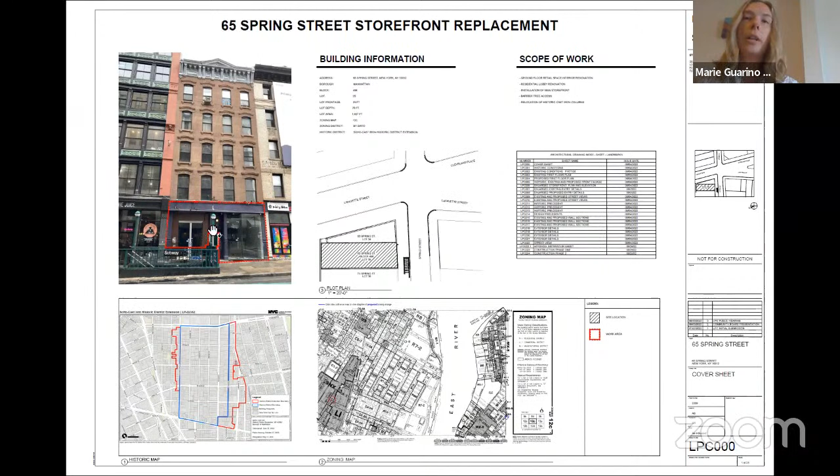Good afternoon, commissioners. Marie Guarino, preservation staff. The item before you is for 65 Spring Street in the Soho Cast Iron Historic District Extension. The building is located on the north side of the street between Crosby and Lafayette Streets. The application is to replace storefront infill and to relocate the historic cast iron columns.

Here are the 1940s tax photos. You can get an idea of what the historic storefront looked like, with the projecting storefronts and cornice. These are the existing condition photographs. The historic columns are all intact and located in their historic location, but the infill is modern.

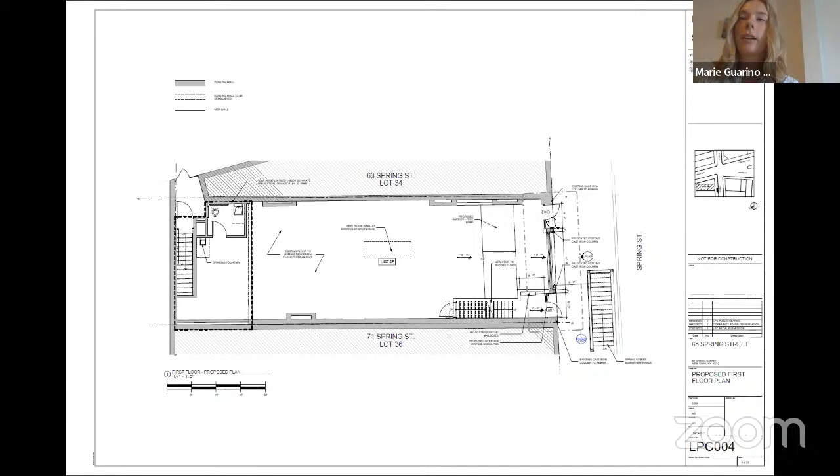Here's our existing floor plan. You can see there are 2 small storefronts flanking the central residential entrance. And here is the proposed plan. You can see those 2 columns have been moved outwards to create one large storefront with an entrance at the east side of the building, and the residential entrance being moved to the west.

So here's the assumed historic condition, the existing condition, and the proposed. You can see in the proposed, these middle columns are shifting outward to create one large storefront window. This will be the retail entrance on the right and the residential entrance on the left. The residential entrance will feature frosted glazing at the door and the side light, and an existing plaque will be relocated over the side light.

This plaque is commemorating a previous tenant. The proposal also includes a new metal cornice with details that recall the historic cornice.

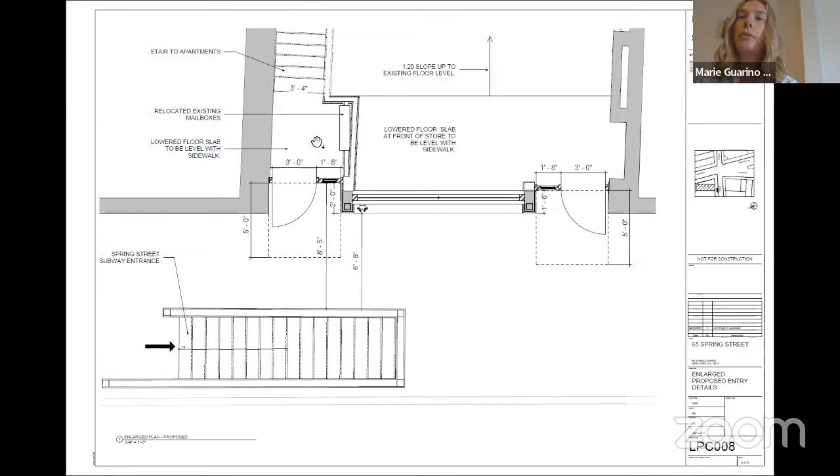Again, we have our existing and proposed drawings, and here's an enlarged floor plan of the existing condition. One thing to note is that at all of the entrances, you have to step up. Part of the proposal is to lower the front of the floor slab to have at-grade entrances.

And then we just have some existing and proposed street view renderings. The applicant, Robert Bianco, is here to take you through the rest of the presentation. Thank you, Marie. Robert, would you like to add anything at this point?

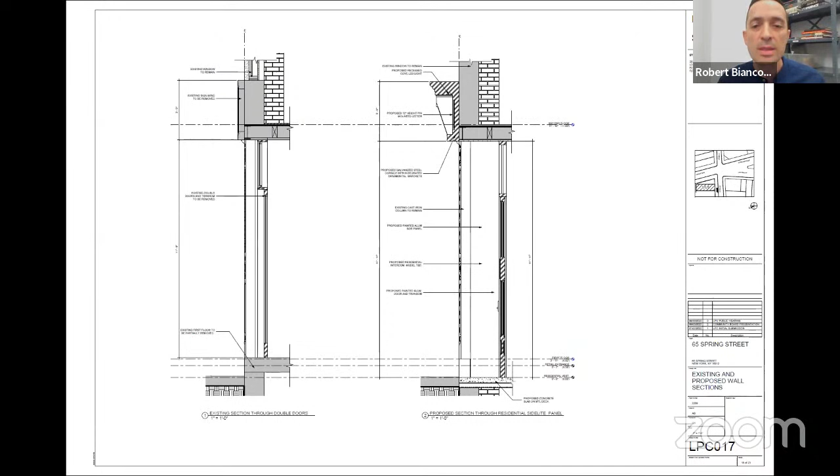And then a similar section at the residential entry door. Next slide.

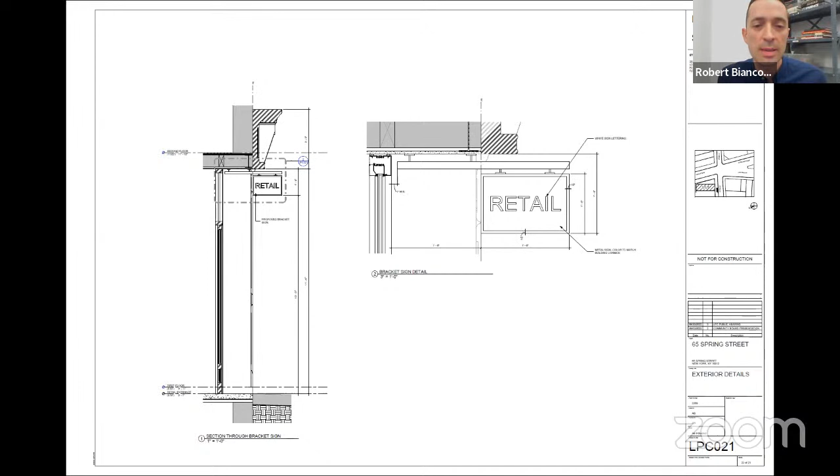And a bracket sign which would comply with all landmarks rules located directly above the retail entrance. And I think we'll end on another image. Next slide, sorry.

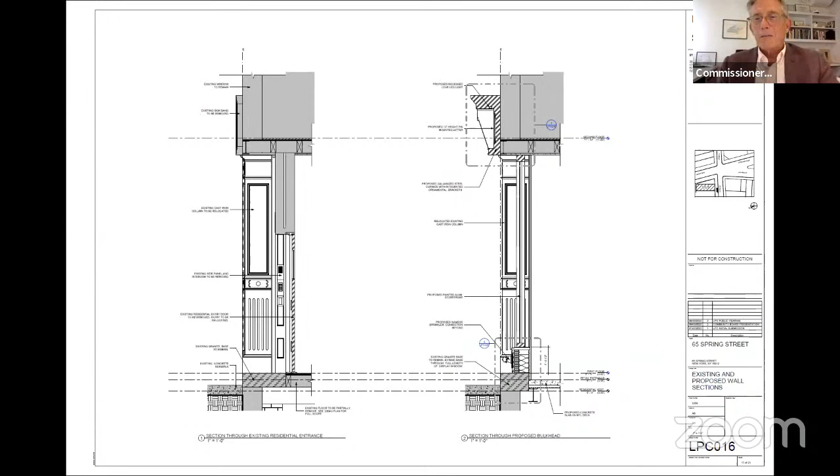Yeah, particularly in the display window, it seems like you could do that. And as a recompense for moving them from their historic location, maybe that's something that's worthwhile thinking about. Anyway, thank you. Great, thank you.

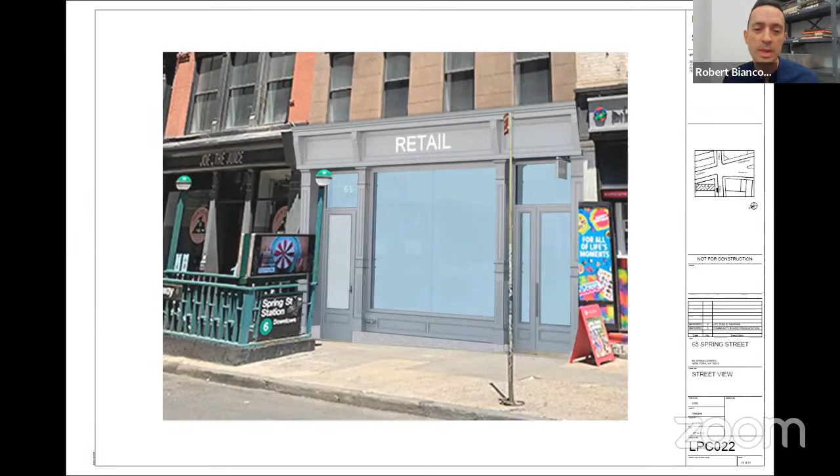Sure, thank you. I do want to address those concerns about tenancy, occupancy, and construction disruption. We included in this presentation, if you could go to the appendix drawings. I don't want to focus on this too much, it's not really part of the application, and these will be much more developed further, but the Department of Buildings has very strict requirements for tenant protection during construction.

The good thing is that the first floor retail spaces are vacant, and the second floor apartments are vacant, so that new entrance and stair can be constructed as a first phase of this project. On the next page, that central stair is being maintained, so there is no plan to move the current access stair for the tenants on the 3rd, 4th, and 5th floors.

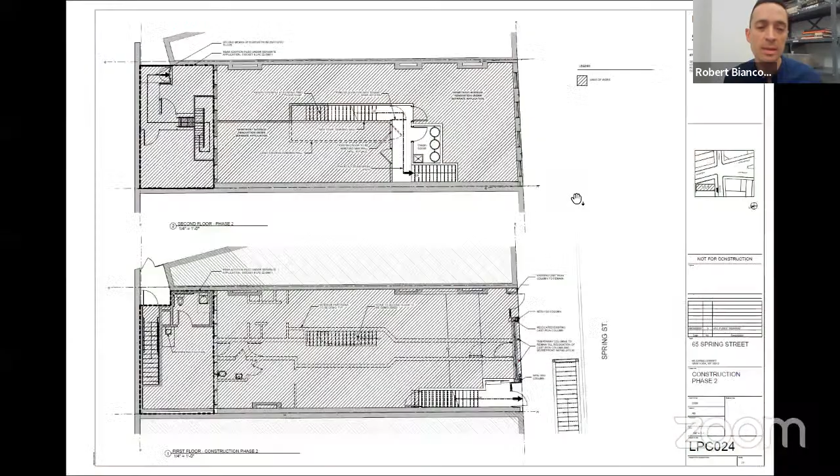If you could go, Marie, to page 8, I'll talk about the accessibility concerns. The current condition at all doors is in no way ADA accessible. There's a step up to every door — an 8-inch step up to the residential entrance door, and just 3 feet between the two columns. What we're proposing on the next page would provide all of the required ADA clearances, the 18 inches on the pull side of the door. That residential entrance door will be recessed into the building, so even though it's located behind the subway entrance, there's still 8 foot 5 inches clear from the door to the subway entrance.

Do you want to address again the appropriateness of relocating the cast iron columns? Sure. Like we pointed out in one of the slides for precedent, there are other mixed-use tenement buildings with original configurations that had one large store on one side and an off-center building entrance. I believe what happens in those buildings is very similar to what we're proposing with the stair — slightly different, in that there's probably a long corridor when you enter on the first floor, and then you turn and transfer over to that center stair.

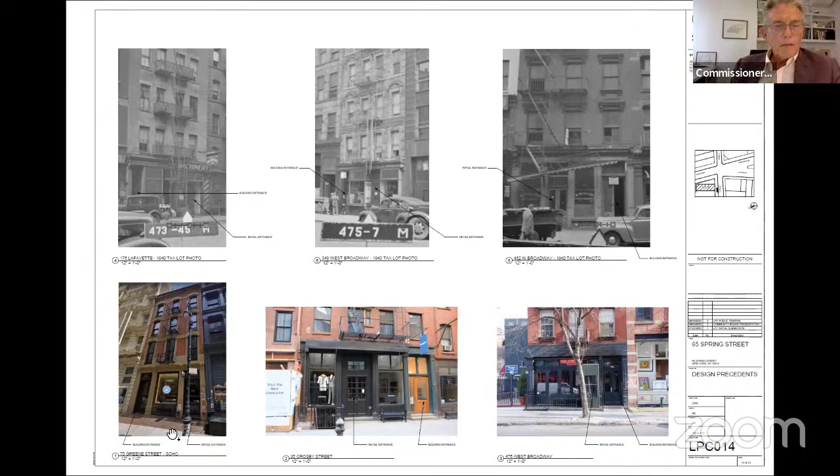No, not to that width. I think there is the photo on the bottom, 70 Greene Street — it's a narrower building, and that does have a single display window that goes from bulkhead to underside of cornice. Is that the lower bottom left? Yes. But no, not quite that configuration. We do believe that the historic configuration at this building, although the display windows were much narrower, it looks like from the 1940s tax photo they went from the bulkhead to underside of cornice.

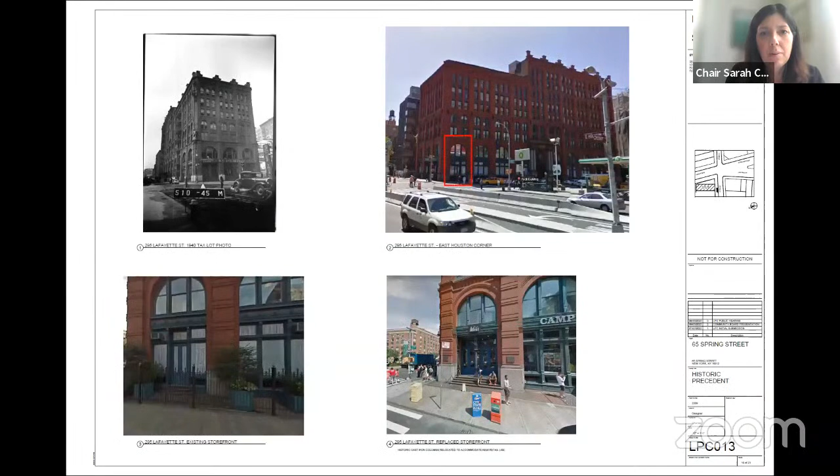Okay, and what was on the next slide? Were there other examples of streetscape? I thought there were some other streetscape photos. No. Oh, and then previously, 155 Mercer is a different building type, but also has a larger center window. That modification was done prior to designation. Got it. Okay, other questions?

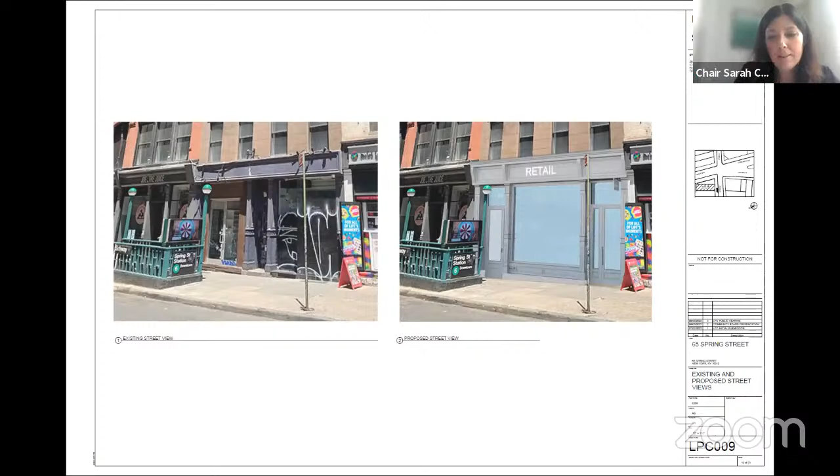Okay, so the hearing is closed and we'll begin our discussion. We've heard a lot of testimony about concerns with occupancy and use. Again, those issues are not under our purview, although we are sympathetic and hope those concerns can be addressed independently by the owner and the tenants.

In terms of the proposal before us, it is to relocate the historic cast iron columns to reconfigure the ground floor. This is something we have done before. We recently approved relocating cast iron columns on a stable building in the village, and we have also done it on buildings in Tribeca to reconfigure storefronts. So it is something we have done on occasion, and as far as we know, it has been done safely.

So the question is: is it appropriate in this instance, in this streetscape, in this historic district? And then is the resulting design of the storefront and cornice appropriate? So we'll begin our discussion. Commissioner Gustafsson, would you like to start this one?

Yeah, sure. I appreciate your last comment, because I recalled seeing us approve moving columns in the past in somewhat more controversial situations, where columns were much more significant. So I don't have an objection to moving the columns. I do have an objection to the large sheet of glass, which is disproportionate, and I don't think we saw any precedent for it. I think Commissioner Bland pointed that out. So that has to be resolved, perhaps with the transom.

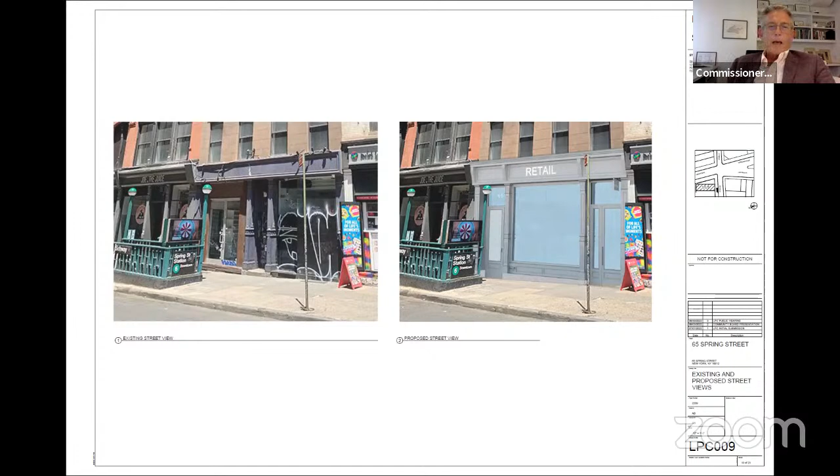But I'll stop by saying, whoever it was—I think it was HDC—said to at least paint it dark gray or black like the neighbors, instead of this light, wishy-washy gray. So there I am.

Thank you, Commissioner Jefferson. I agree with almost all the comments. I do think if they push the glass plane back and expose more of the columns, it would be a richer architectural product. The issue for me is this square window—square is always a powerful form, it's dominant. Whether they add a transom piece across or not, I have no real conviction one way or the other.

Okay, so I think we are unanimously comfortable with the relocation of the cast iron columns and the general basic design of the storefront infill with the panel bulkheads and the new cornice. I think most of us believe that the planes should be set back for the entries as well as the window to fully expose the cast iron columns.

And I think we want to ask them to continue to work with staff on the articulation of the central window, exploring the right proportions with a vertical or horizontal mullion, and to restudy the colors of the storefront and cast iron to be contextual within the streetscape, and to ensure that the cornice has enough level of detail and articulation to also be contextual.

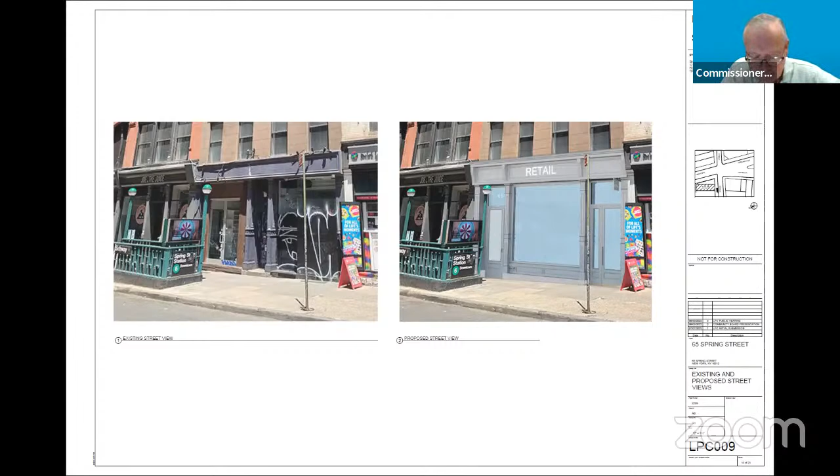Muted. Sorry, thank you very much.

All right, and Commissioner Chapin, would you second that motion? Second. Mark, will you call the vote?

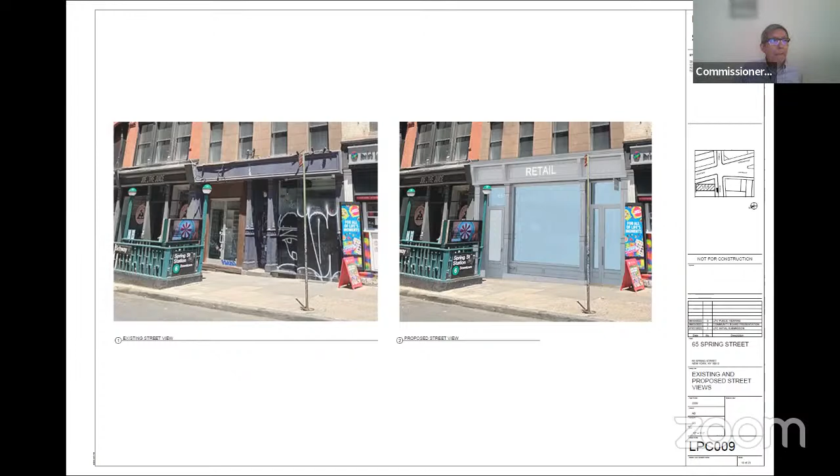Chair Carroll, aye. Commissioner Bland, aye. Commissioner Shamir Barron, aye. Commissioner Chapin, aye. Commissioner Chen, aye. Commissioner Goldblum, aye. Commissioner Gustafsson, aye. Commissioner Jefferson, aye. With 8 in favor and none opposed, the motion passes.

That's approved with the condition that you continue to work with the staff on these refinements. So please do so. Thank you.

Thank you. And we'll now move to public hearing item number 3, LPC 22-09003, an application for a certificate of appropriateness in the Borough of Manhattan, Block 622, Lot 63, 73 Perry Street in the Greenwich Village Historic District. This is a French Second Empire style row house designed by William Noggle, built in 1868, and altered after 1925 with the removal of the stoop, an entrance, and installation of a medieval half-timbered style bay. The application is to alter the facade and areaway, excavate the rear yard, and construct retaining walls.

Hey, Commissioners, the applicants have entered the hearing. They now have control of the presentation. The applicant team may begin. Please state your name for the record.

Hi, my name is Sharon Kim, and I'm the architectural designer of this project. Our proposal is for 73 Perry Street, located in Greenwich Village.

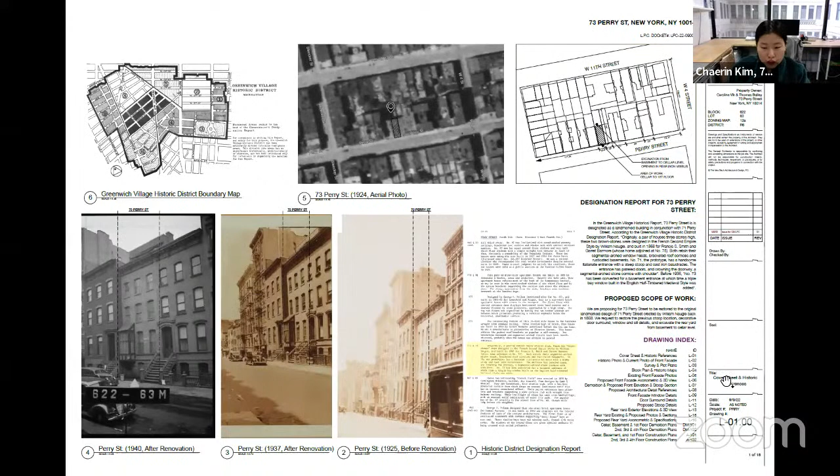We're proposing to restore the original stoop location, decorative door surround, window and sill details, and excavate the rear yard from basement to cellar level.

So from 1925 to 1937, 73 Perry has been stripped of its architectural elements that stay true to its original landmark design. The 3-story building was designed as a pair of brownstones with 71 Perry.

Both were originally designed with a stoop entrance, as seen in the 1925 photo. In present day, the original stoop was replaced with a basement entrance and a half-timbered medieval window, with 9/9 windows to match.

We're proposing to restore 73 Perry's original landmark design by restoring its original stoop location, designed in 1868 by architect William Noggle.

By doing so, we're requesting to restore again its original stoop location, but also replicating 71 Perry's historic architectural details of the facade and stoop area.

From historic photographs that we reference, the 1940s tax photo of 71 Perry, Perry Street is iconic for its buildings with a stoop entry and ornate entrances with a carved wooden door.

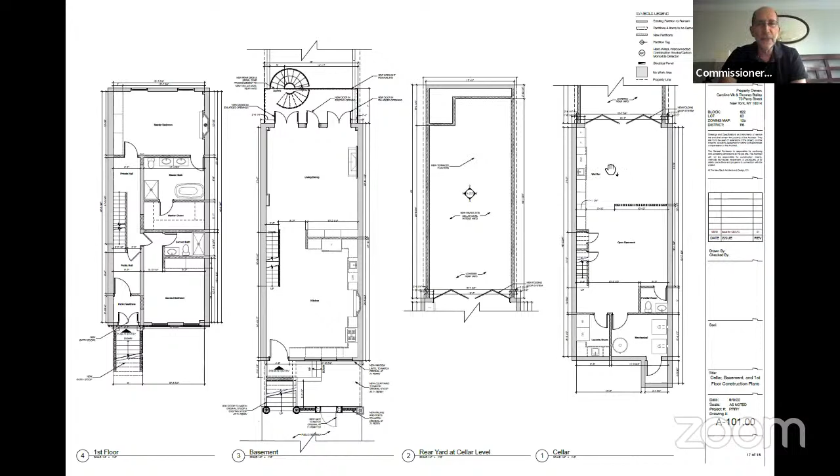Commissioner Goldblum: Thanks. All right, so the elephant in the room here is the peculiar and charming little Tudor bay window that you're proposing to move. Now, while there's no question that it's not original to the house...

Someone must have talked to you along the way about the fact that that's not our only standard, and that sometimes we look at subsequent modifications that have historic value as significant and worthy of protection. For me anyway, I think you need to make the argument, and succeed in making it, as to why we should permit the removal of that subsequent but charming addition in order to do what you're going to do. And I don't believe I heard that.

Yeah, I think, well, originally the 1868 design by architect William Noggle was with the original stoop location, and the removal of that stoop was happening especially when a lot of stoops were being removed from brownstones throughout the city, especially in well-known historic districts.

So if you walk across Perry Street, I mean, it's full of history, and to be the only building without a stoop is a bit awkward. We would like to maintain, again, like architect William Noggle has done, many stoops and brownstones across that area.

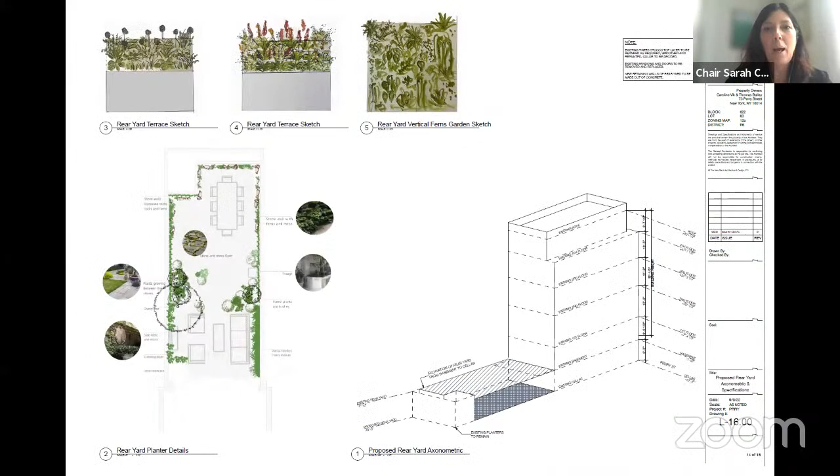And I'll turn it back to you, Chair Carroll. Okay, thank you. And I'd like to turn back to the applicant team and ask if you'd like to respond to the comments, largely following the line of questioning we've already started with, trying to understand more about the quality and condition of the existing bay window. So if you do have any close-up photographs or details, that would be helpful now to show us.

Then I think the community board commented on single pane windows. I'm not sure if they were referring to an earlier scheme or if they're referring to the 1/1 windows. Sorry, Chair, yeah, originally we were referencing the 1925 photo. That was the 1/1 windows. But again, the perspective of the photo is not very clear. So the community board was discussing whether the 1/1 was appropriate for the era in which the building was built, and they weren't sure. So that's where that comment, I think, came from.

I think we do actually have some photos, close-ups of the basement entrance. Maybe Sharon can pull them up. But basically it's two concrete walls on either side. It's kind of wet. You go down a few steps and the door is there. The bay window is in okay shape. We did notice some damage to the roof of the bay window. And like I said, the interior of that bay window is poorly fitted out in adjacency to the actual home.

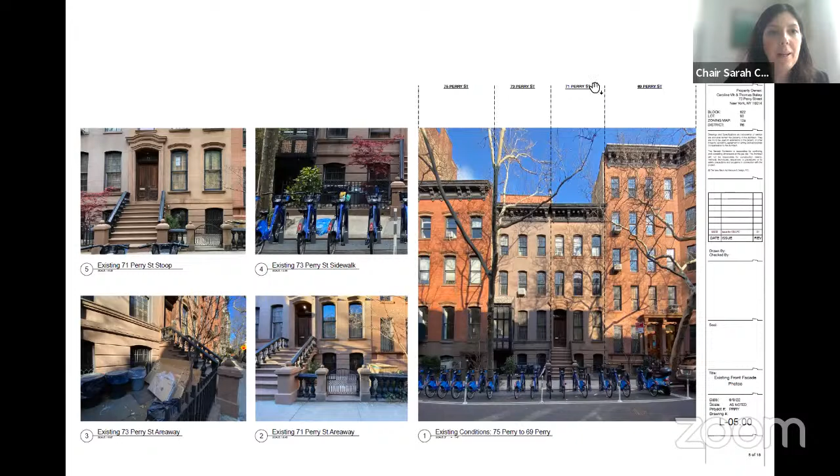Okay, all right, thank you. Commissioners, any final questions? Okay, I don't see any final questions, so we will start to move to close the hearing and begin our discussion. So Commissioner Goldblum, would you make a motion to close the hearing? So moved. And Commissioner Shamir Baran, would you second that motion? Second. All in favor, say aye. Aye. Any opposed? Okay, so the hearing is closed and we'll begin our discussion.

And we have work to consider on the front facade, which includes the removal of the medieval designed bay window and the restoration of the stoop, and the installation of the 1/1 windows, which may be consistent with the date of the original construction and the building's original style. But should we have concerns about removing the bay window, you should also think about the right window configuration and what would work best with the retention of the bay window. So you'll have to consider both the windows and the removal of the bay window as a piece, and the option is either this sort of restorative approach to something similar to its original condition, or the early 20th century condition. And then we have the addition and lowering the grade at the rear.

So Commissioner Jefferson, would you begin the discussion? Sure. This is, to me, pure replication. And the stoop makes sense to me to replicate it, and it relates to its next door neighbor, so it makes sense.

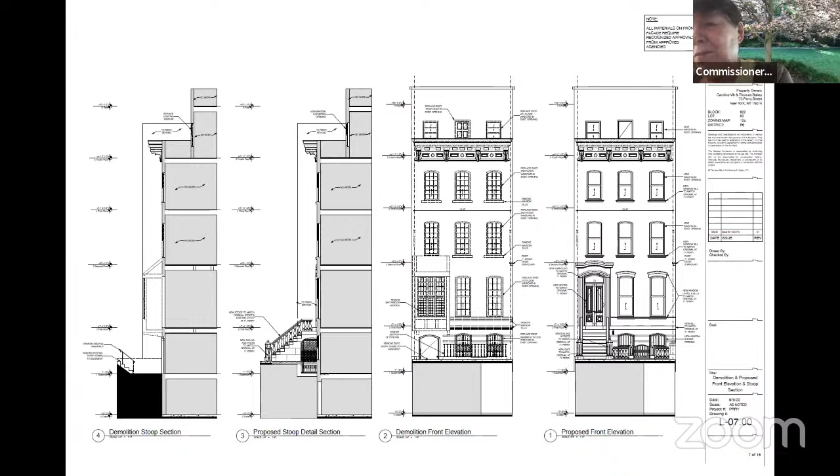That makes sense. Okay, Commissioner Chapin. Yeah, I find in this case the return brings it as close as possible to its partner, when both buildings are still very, very similar. There's been stripping of the one building, and the removal of the stoop, but so much of its original character has been preserved, as has the other building. I think that returning them to a pair is perfectly appropriate at this point, and just that the applicant works with the staff so that the details are compatible and reflective of the partner building.

Okay, great, thanks. Commissioner Goldblum. Well, as the person who started the mess, I have to say that this is a tough one for me too, because it works against all of my instincts, which are obviously shared, to restore uniformity and historical accuracy and period correctness to a project that has none of the above. But I think that in looking at how we've looked at this particular district, it's not Park Slope. It's not endless fields of perfect uniformity, where a break of that uniformity is an aberration. Here, the aberration is the rule, and the modification and the layers of history are what make the place special. And the fact that the staff back in the day found this particular quirk worthy of relatively extensive verbiage suggests to me that I shouldn't be totally cavalier in blowing it out.

I don't think that this is anywhere at all like a stripped facade where they just scraped all the moldings off and put a colonial door in the basement. I think this was an intentional, whimsical, weird thing. That said, it would certainly be aesthetically and anally satisfying to have the thing restored to the original condition. But I think that for me to be consistent with our earlier ways of looking at things like this, we would ask the applicant to help make a case that this artifact, while perhaps charming and worthy of designation notation, is either unsustainable or poor quality or falling apart or some other thing besides 'I want to make my building look like my neighbor's building.'

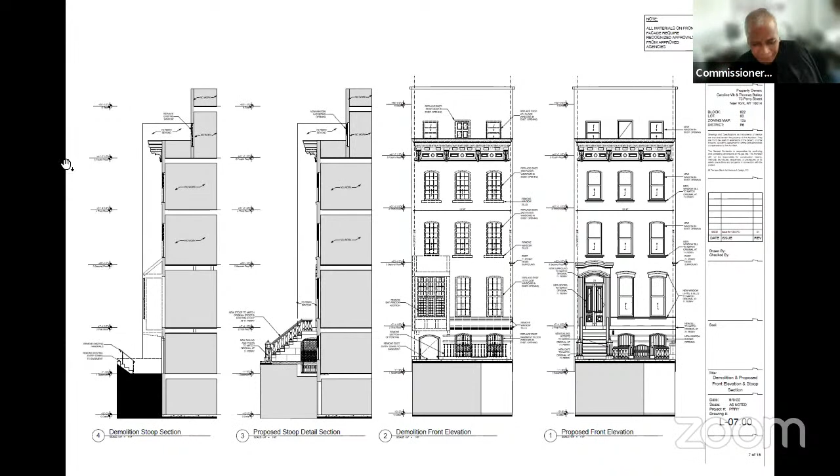Okay, so that's approved. Please continue to work with the staff on the refinements, and we will move to the next item. Okay, the next item is public hearing item number 4, LPC 22-12128, an application for a certificate of appropriateness in the Borough of Manhattan, Block 552, Lot 7505, 133 West 4th Street in the Greenwich Village Historic District. This is a neo-Grec style church house designed by Charles Haddon and built in 1879, and the application is to install a stoop gate.

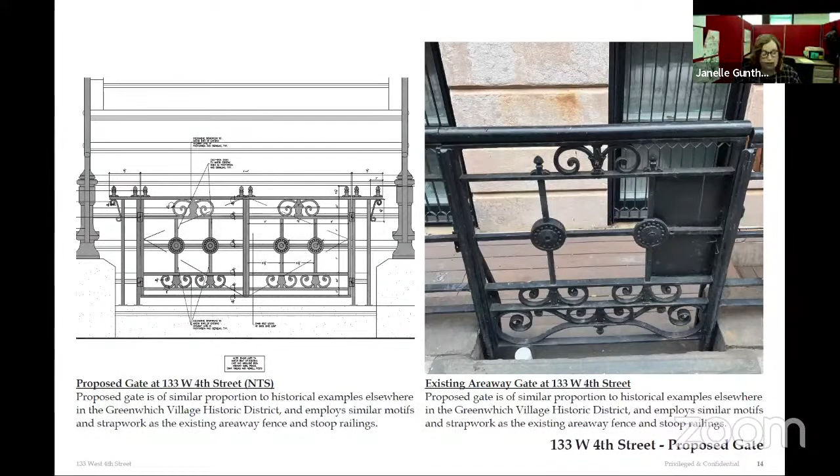The applicants are present to discuss the appropriateness of the proposal and answer any questions. Okay, the applicants, please go ahead.

My name is Mick Doyle of Acheson Doyle Partners, and with me is Andy Liu, the project architect and designer on the work.

Commissioners, there's no arguing that it's a beautiful, well-maintained addition to the historic district. It just happens to be located between 6th Avenue, which is very active with movie theaters, restaurants, the basketball courts, and MacDougal Street, which has a very active nightlife. Having grown up on 14th Street, I can attest to that, as it hasn't changed in, I won't give you the number of years.

The block is a beautiful block. It's not a block of row houses, so to speak, but individual buildings. The subject property has a large apartment building to the right, which faces Washington Square Park, and to the left, a church which has been converted under your watchful eye into condominiums, and across the street a mixture of apartment buildings and smaller buildings.

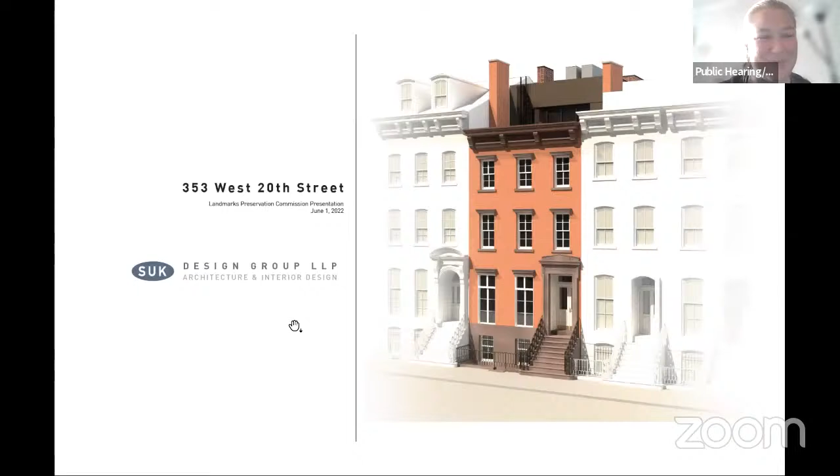John Gordon, SUK Design Group. Bill Suk is also here. We're here to present 353 West 20th Street. The scope we're presenting today for the public hearing is to construct a rear yard addition and rooftop addition, extend some chimneys, and to excavate the rear yard. The project was previously approved in 2016 under another docket number, which was issued in 2016, and it expired, unfortunately, April 2021. We are representing the project with some changes.

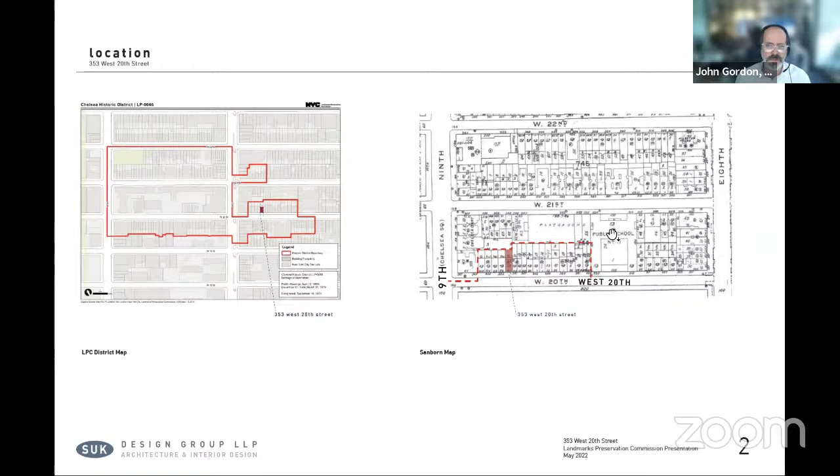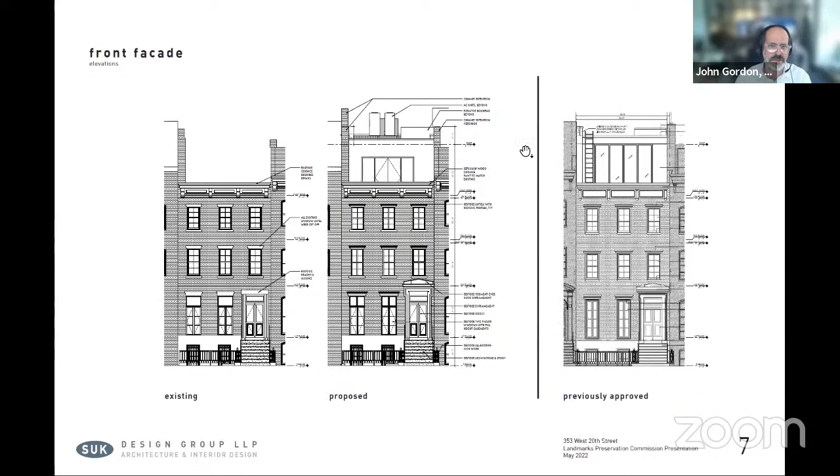This is the drawing the other architect had prepared. There's some little bit of graphical differences between the drawings, but we put a screenshot of their drawing there, and that's what was approved with landmarks back then.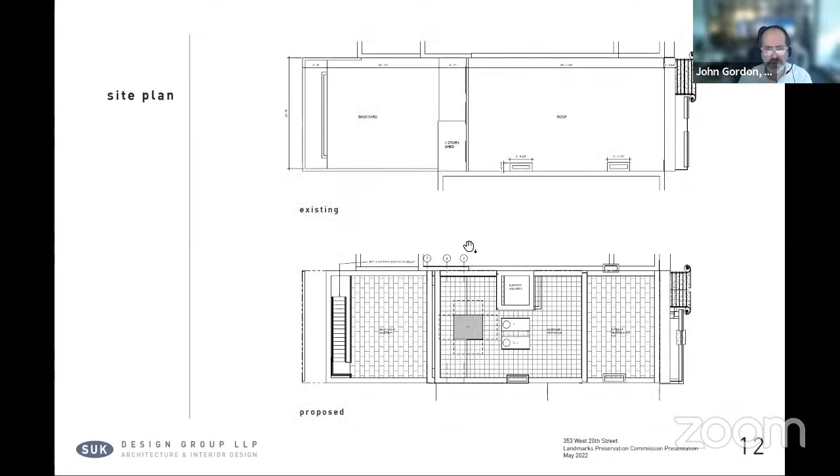And then existing and proposed site plans for reference.

Then we did a quick axonometric. It's a cutaway, showing the neighboring houses cutaway. You can see 351's extension is further forward towards the street on their top floor, so we're pushed back from that. We are extending the chimneys a small amount in order to make sure we comply with the regulations for chimneys,

and just rooftop equipment and elevator bulkhead. Then just showing the rendered axonometrics, this is the front facade and the rear facade, showing this is a better example of the condition of the house between the other houses.

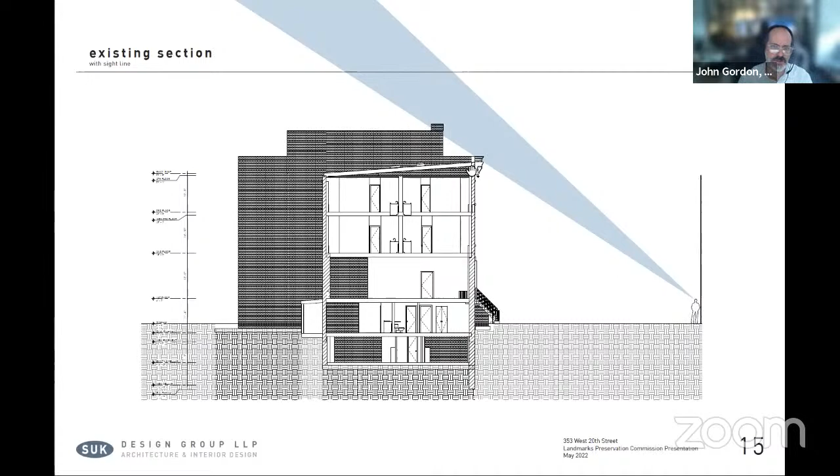So then we move to the sightline section, showing the view from across the street. This is the existing condition of the house, and then the proposed.

Showing here in the section, the blue is what was approved back in 2016 as an extension for the top floor, the rear, and the excavation. We found that we can actually legally by zoning extend slightly more in the rear, so we've added about 4 feet in the rear of the house from the previous approval. So that's what the yellow is representing.

Moving on to the visibility studies, we did a mock-up on the roof. This photo is just generally showing the mock-ups there. And then from the front, you can only see the extension of the chimneys, which are the chimneys on 353,

and this is the chimney on 351. You're basically, the visibility of that angle is from this location across the street, looking at this side. Directly in front of the house, there's some trees, but you can't see it there, so.

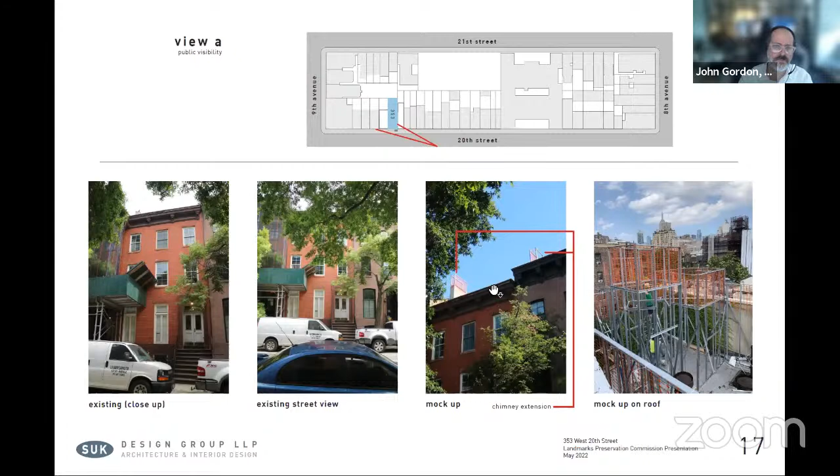And then there is visibility from the rear. It's very minor, but since there is this large play yard from 21st Street, if you're standing near the gate where the school kids could go in and out, there is a vantage point looking diagonally through.

You can see in these photos, these are the fences along the sidewalk. And then we highlighted where the visibility is in these three shots, and I'll flip to the next page. You can't see anything with these really tiny pictures, but the next pages have been enlarged so you can see it better. But that's the little bit of vantage point.

It's just a small pocket from here to here because you're between this large building and 351, which extends further back and also is quite tall.

Flipping to this, you can see there's just a tiny bit of the mock-up present. Going to the next slide, a little bit more of the mock-up. The next one is a little clearer, and you can start making out a bit of the orange netting, but only a tiny bit. As you go further west, this building will block your view, and further east it disappears behind this. So it's just a small window.

Just showing the existing additions, the new brick we're going to be using in the back, and the metalwork materials on the rear facade.

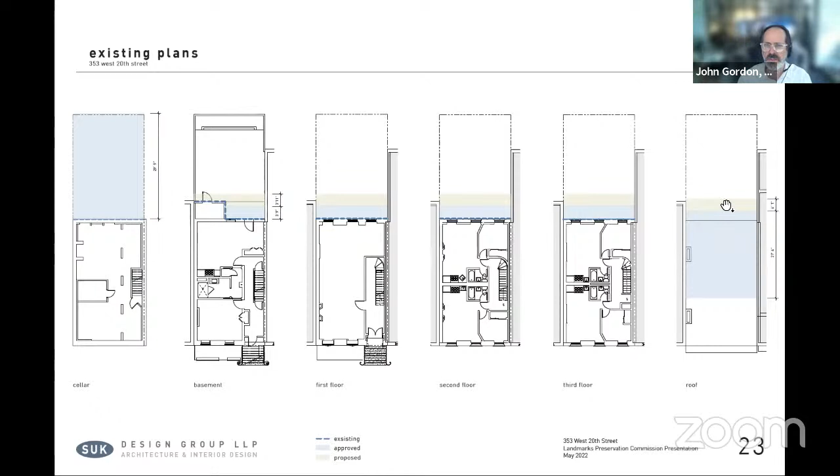Again, the plans, matching the section, showing what was approved in 2016 in blue, and what we're applying for today in yellow. On the proposed plans you should see it here, same condition, and we put that on the approved plans from back then too, from the 2016 drawings, so you get a reference point of what was approved by Landmarks in 2016 versus what we're applying for today. Then we'll close with the renderings from the front facade and the rear facade.

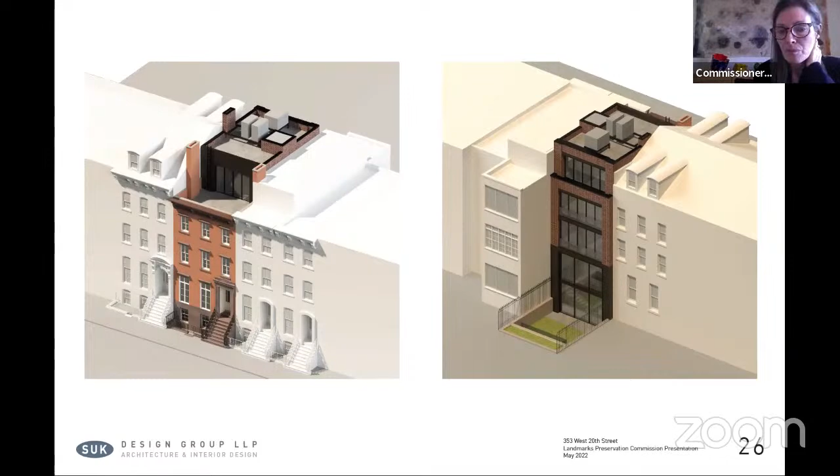Commissioner Shamir Baran: Yes, I agree. Set back the top floor from the parapet.

Okay, great, Commissioner Goldblum. Yeah, I agree with the consensus. To be specific, in my view, the bottom 3 floors are fine as shown, although the architecture might be a bit stark. We generally don't comment too much on the design of the lower facades, as long as the spandrels are showing, which they do. But the top floor of the former building should remain in its current location.

I don't understand or remember, I have a pretty good memory for a lot of these applications. I do not remember approving this one with a full setback. That's a no-no in my book. The existing historic rear wall at the top floor should remain, as it almost always does.

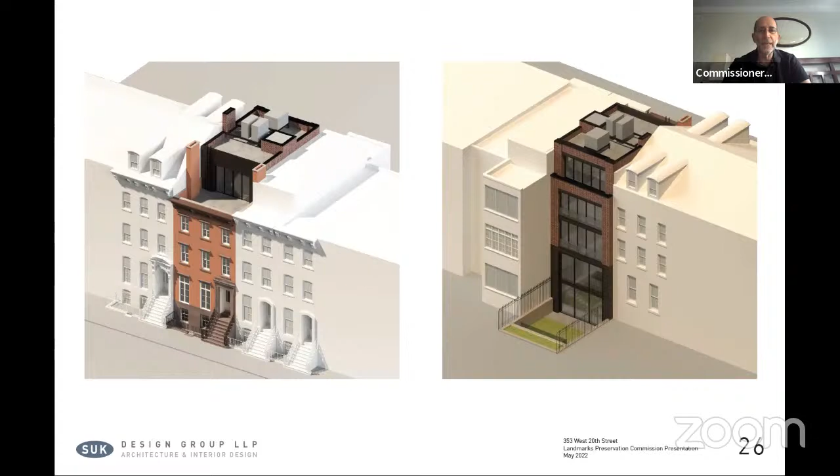And the rooftop addition should be set back at least 3 feet. Sounds familiar to the applicant, I'm sure, as again, we always do.

Okay, all right, thank you. Commissioner Chen? No disagreement here.

So I think we've heard that certainly there are concerns about the additional bulk that's being added, and may even be some concerns about the reauthorization of what was previously approved, given the context here and a sort of reevaluation. So we'll ask you to continue to work with the staff to reconfigure your proposal, and we'll bring it back as soon as you're ready. We'll take no action today and move to the next item.

Okay, we'll now move to public hearing item number 7. This is LPC 22-11906, an application for a certificate of appropriateness in the Borough of Manhattan, Block 1124, Lot 58, 50 West 72nd Street in the Upper West Side, Central Park West Historic District. This is a neo-Renaissance style apartment hotel designed by Sugarman and Berger and built in 1926 to 27. And the application is to replace storefront windows.

Okay, commissioners, the applicants have entered the hearing and the staff will take you through the presentation. Good afternoon, Commissioners. Marie Guarino, Preservation Staff.

The item before you is for 50 West 72nd Street in the Upper West Side, Central Park West Historic District. The building is located on the south side of the street between Columbus Avenue and Central Park West. And the application is to replace these storefront windows at the front facade.

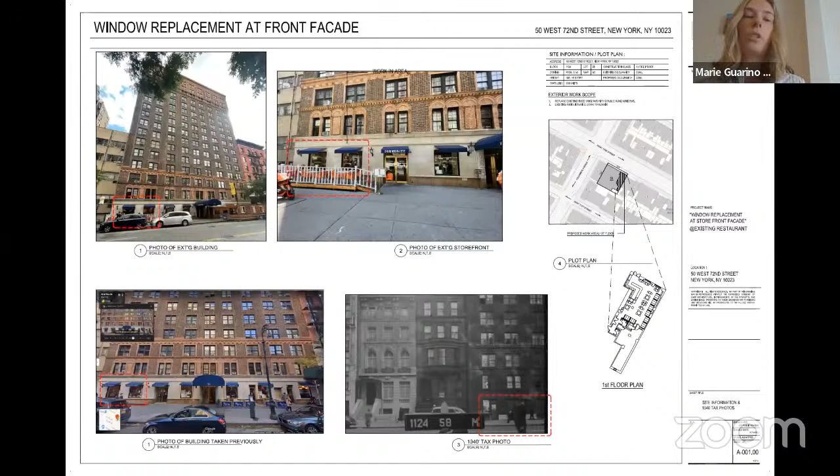And the applicant is proposing to install paired 4/4 double hung aluminum clad wood windows with a black finish to match the windows on the upper floors of the building and to better recall the windows and doors that were originally found at this location on the building.

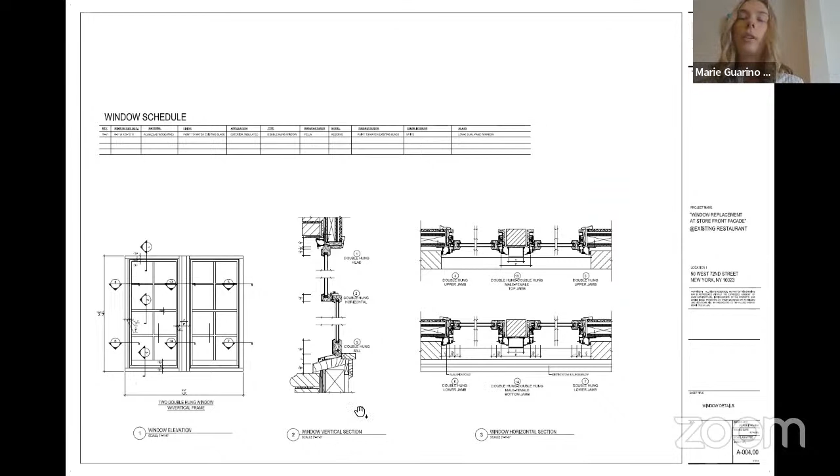So here we have the existing and proposed elevation and a rendering showing the proposed condition. And here are the window details. So they'll be using a profiled panning for the mullion and the brick molds to recall the details on the upper floors. And the applicant is here if you have any questions.

Okay, thank you. All right, commissioners, do we have any questions? Basically, the commissioners approved new cladding and removing 4/4 double hung windows to install single pane windows uniformly across the ground floor of the building, and the applicant is now seeking to return 4/4 double hung windows to these two openings that are furthest from the avenue. Any questions? Okay, let's move to public testimony.

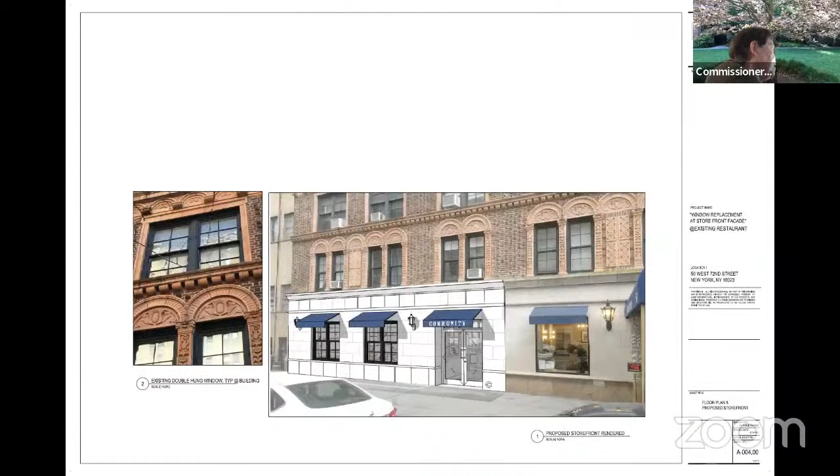In the matter of a certificate of appropriateness, Borough of Manhattan, LPC 22-11906, 50 West 72nd Street, Upper West Side, Central Park West Historic District. A neo-Renaissance style apartment hotel designed by Sugarman and Berger and built in 1926 to 1927. The application is to replace storefront windows. I note that the building style, scale, materials, and details are among the features that contribute to the special architectural and historic character of the Upper West Side, Central Park West Historic District. I recommend approval, finding that the work will not eliminate any significant historic fabric, that historically the window configuration at the ground floor matched those at the floors above. Therefore, the installation of black finish 4/4 double hung metal windows will help bring the building closer to its historic condition, and that the work will not detract from the special architectural and historic character of the building, the streetscape, or the Upper West Side, Central Park West Historic District.

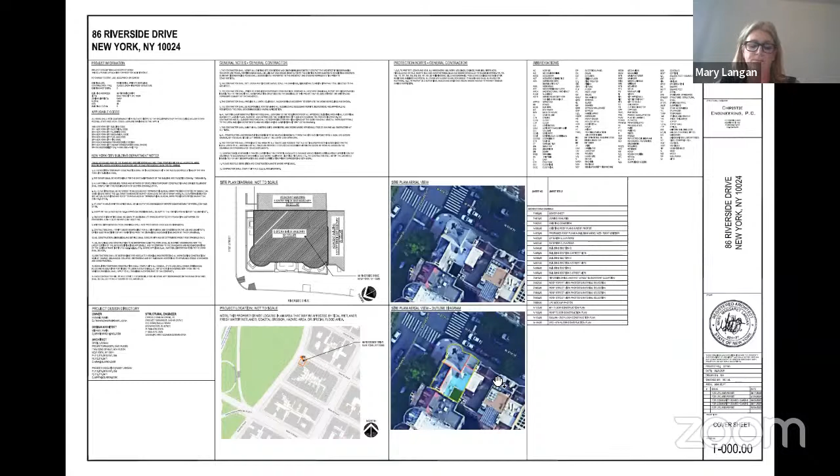At staff level review, under a separate application, we will apply for a certificate of appropriateness for the existing roof restoration, roof tile replacement, and the exterior facade scope, which will be a repair and preservation of all existing detailing, stone restoration, window and door replacement, ironwork, ornamental metal, and metal flashing.

86 Riverside Drive was originally designed and built in 1897 to 98 by architect Clarence True in the Elizabethan Renaissance Revival style. Several of his buildings are located within the designated Riverside Drive West 80th to 81st Street Historic District and throughout the Upper West Side. This is the historic photo of our building, and here we've created a montage showing our building and the remaining buildings, all designed by Clarence True.

This building was abandoned for over 10 years, left unmaintained, and thus needs extensive restoration due to improperly maintained roofs, drains, gutters, leaders, chimneys, windows, and doors. The new owners intend to restore the building envelope to its glory and restore and renovate the interior. They intend to occupy all floors as a single-family home, and as such will be installing an elevator for accessibility to all interior floors from cellar to 6th floor, the top floor being the proposed enclosed addition and its associated rooftop structure.

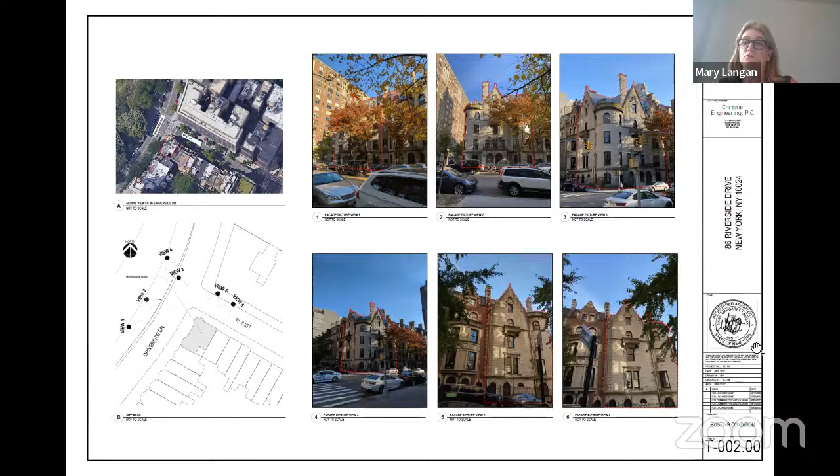The existing flat roof and areaway conditions are shown in this drawing and the photos. Again, this is Riverside Drive and 81st Street. These are the tiled gabled roofs that rise up from the street facades. This is the existing ridge line, then the slope down for the rear of the building, and then the flat roof.

In the photos, the first one shows you standing on the roof, looking at an old skylight and the slope back up to the ridge lines. This one shows you standing here, looking at this part of the roof and the slope back up to the ridge line facing 81st Street. This photo shows the hatchway, the existing access to the roof, and then the areaway behind it. This photo is on the 5th floor roof, showing this roof and the slope up to the high ridge here.

The proposed design has been prepared with consideration to achieve a minimally invasive addition that is visible from the public way, but complements the characteristics, material, and detailing of the existing building.

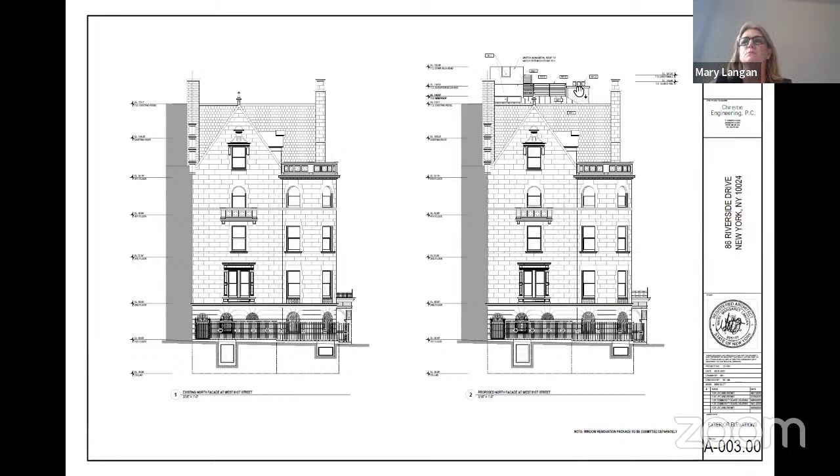This slide shows the 81st Street facade. Again, stair bulkhead here, standing seam roof, the guardrail, the elevator bulkhead, and the green wall fence. We're also showing that we need to extend this chimney, which is actually on the Riverside Drive facade. We need to extend that and provide a flue cap, and for that we're proposing an oxidized copper.

Section G is cutting through the building from 81st Street, going back to the south party wall, looking east. The sightline diagram here demonstrates that you cannot see the addition from the street when standing on the north side of 81st Street, directly across from the building.

So here's the ridge line. This is the metal roof, the flat roof in front of the stair bulkhead, the areaway addition, and then the elevator bulkhead and the green wall fence.

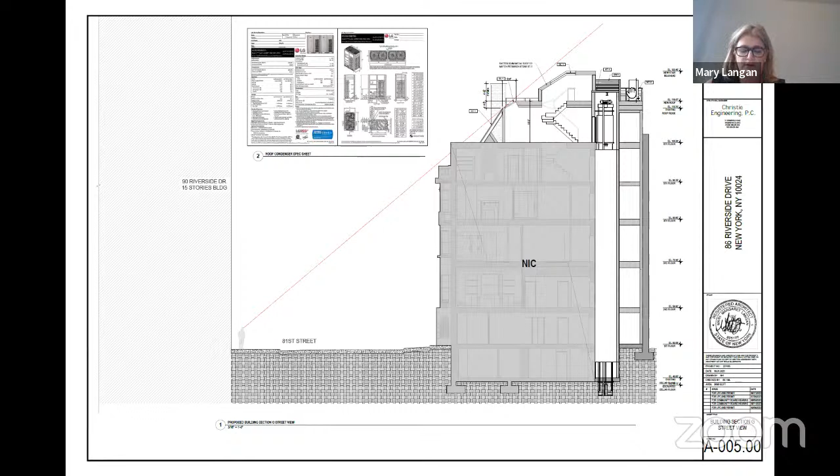So we were able to build a mock-up, and then we took the mock-up and our drawings and provided these photo montages based on the proportions. So A1 is standing diagonally across from the building, and A1 is the existing, A2 is the proposed. Here you can see the stair bulkhead roof here, and you can see the cable rail here and the metal flue extension.

This view B is taken across the street, on the sidewalk across the street here. And here you can also see just the very top of the metal roof, the standing seam metal roof. You see the cable rail here, and then in the background you can see the zinc colored flue extension here.

View C is across the street on 81st Street. This is the neighboring building. You can see here that you cannot see the extension. And I'd like to point out that our guardrail is very similar to the one on the neighboring building here.

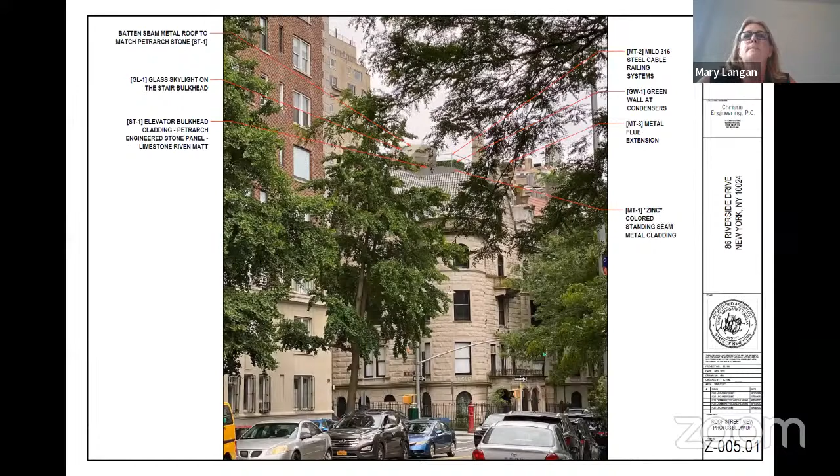And we blew that up. This is our mock-up. So we created the stair bulkhead, the elevator bulkhead, the green wall fence, and the guardrail, and photographed it and put the orange mesh. And we did use that when we were creating our photo montage.

This here shows the existing condition, and then it also shows the 6th floor addition, the floor plan of it. This is the location for the stair up to the roof, the elevator, occupiable space, and then mechanical shafts. This shows the area of the sloped roof plane that rises up from the ridge and has the skylights in it.

This is a repeat, again, showing in the background here, the back of the building, the stair bulkhead, the elevator bulkhead. Okay, I think we have the layout of the plan. And then these two slides just show our rear addition, the areaway addition.

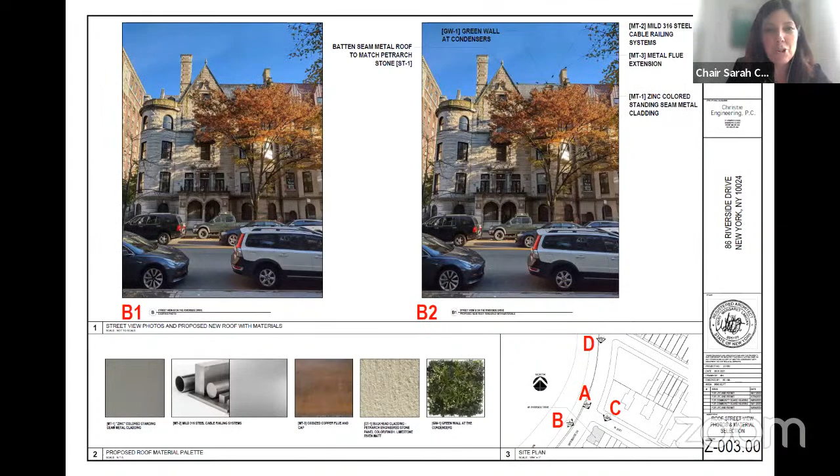So that's it. Thank you for your time and consideration regarding what we believe will be a beautifully restored home. Okay, thank you. And commissioners, do we have any questions at this time?

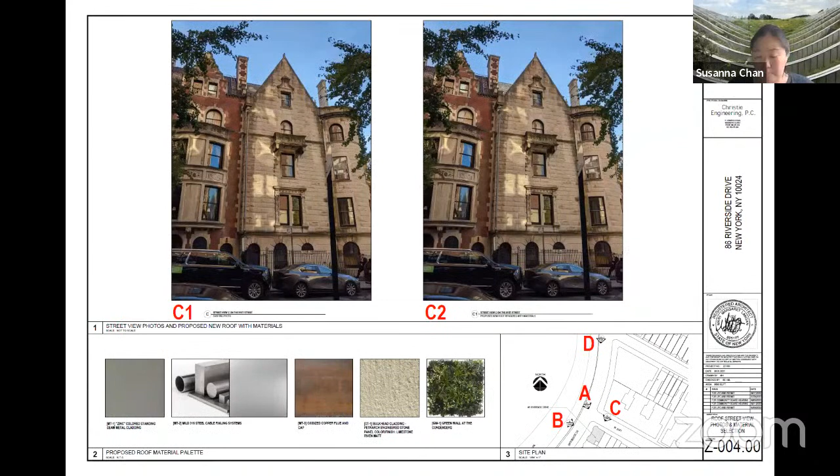My name is Susanna Chan with O'Neill Langen Architects. If I could point out page 4, there is an existing expansion currently at the neighboring house, page 4, A-000. In the lower right-hand corner of the previous page, I wanted to point out the red construction that actually lines up with the ridge line. The third photograph down is in fact a vertical extension at 320 West 81st Street. So I just wanted to note that.

Thank you. We have a question, Commissioner Gustafson, please go ahead. That example that was just given to us, is that something we approved? I don't know that. We don't know that, sir. Thank you.

Any other final questions? Commissioner Gustafson, the staff can maybe try to figure out the history of that addition for you, the adjacent building, and whether it predates designation. Okay, I just sent you all requests to unmute, hopefully you'll accept those.

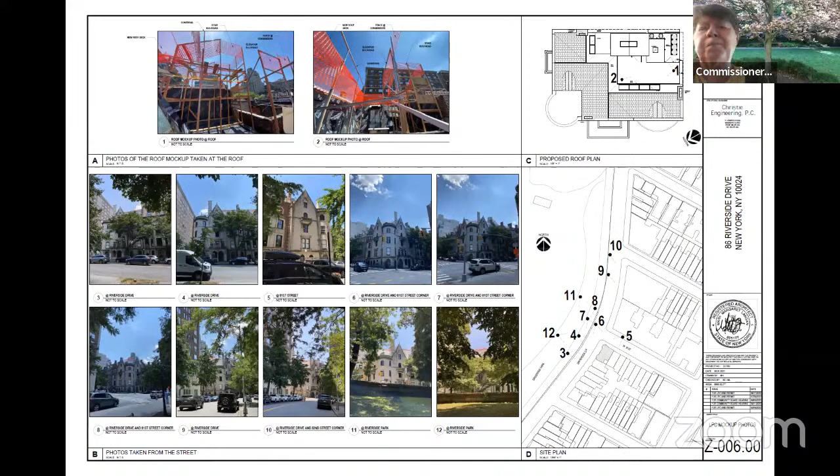Commissioner Jefferson? I agree with my fellow commissioners. Commissioner Gustafson? Agreed. Commissioner Chapin? I agree. Okay, do you all agree that this is something they can work on with the staff to significantly reduce the visibility of the bulkhead and the railing and any other portions that can be set back, or would you like it to come back? Staff, okay, yeah, that's what I think I'm okay with.

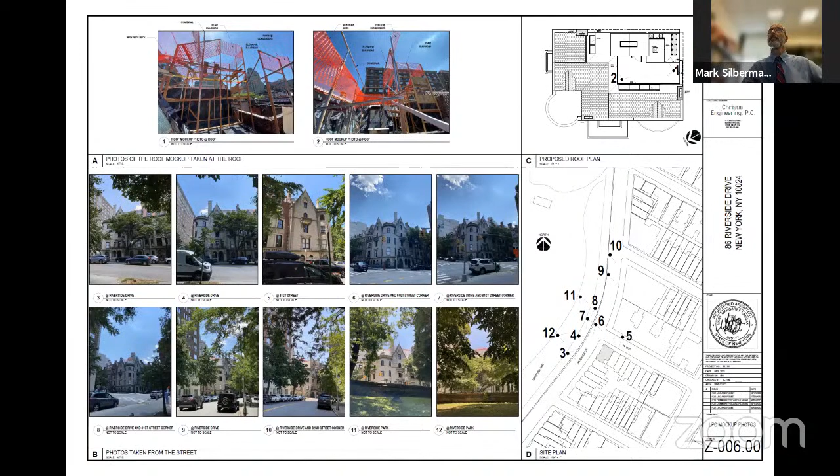So that's approved with those modifications. Please work carefully with the staff to address the visibility issues as described in the motion. And we'll move to the next item.

All right, the next item is public hearing item number 9, LPC 22-12198, an application for a certificate of appropriateness in the Borough of Manhattan, block 1868, lot 59, 258 West 97th Street, in the Riverside West End Historic District Extension 2. This is a Renaissance Revival style flats building designed by C. Huntington and built in 1901-03. The application is to alter the facade to create a barrier-free access entrance and install EIFS cladding at courtyard facades.

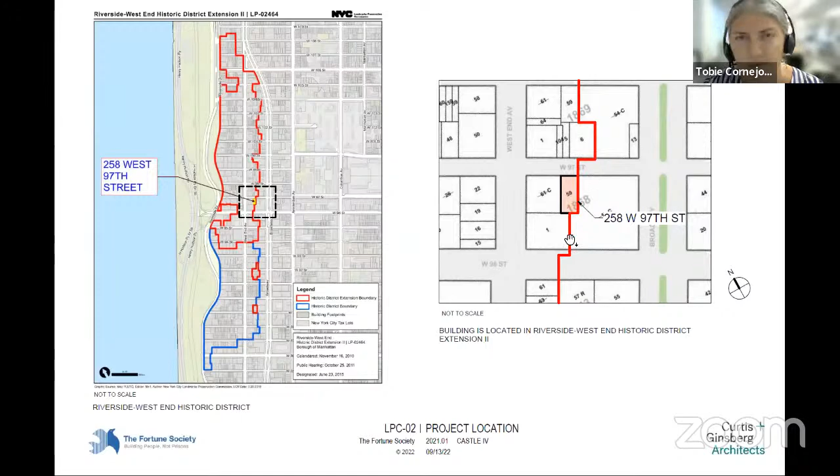So the building is in the Riverside West End Historic District. It's right on the edge, on 97th Street between Broadway and West End. The east side is the most visible non-primary facade of the building. It was built in 1903. In the 40s, here on the left, it sat between two larger buildings.

By the 80s, the building to the east side had been replaced by a one-story parking garage that was part of a larger, taller 34-story project along the corner to the southeast of the project. Today, this is what it looks like on the right, with the non-primary facade quite visible on the east side. This is one of the surfaces where we're going to put EIFS, replacing this cream finish with a cream EIFS finish.

Here's a closer view of that. At the front of the building, this is the current non-historic entrance, which will be retained as it is. There are 2 steps up, and there are more steps on the inside.

Just to the left here, this window is where we're looking to make the alteration for barrier-free access by extending this masonry opening down and inserting a metal bridge across this front areaway. We'd be replicating a lot of this ironwork to make it fit in with all the existing ironwork here at the front.

So this is showing you the outline of where the EIFS would go on the side facades and around the bulkhead. Right now, we can't put it on the back because we have a non-compliant rear yard. It's too shallow.

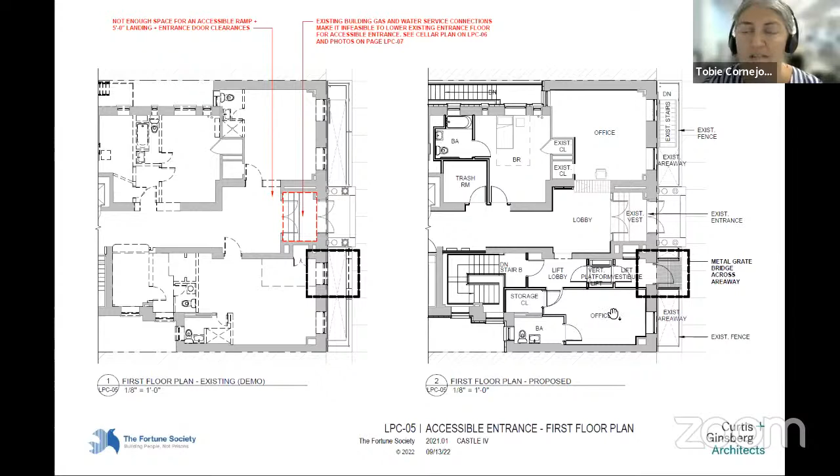The Fortune Society, as part of converting the building, will be creating a lot of new program space in the cellar. So it's important to us to have an accessible route down to the cellar if the existing elevator is not currently accessible.

We looked at doing the accessible entrance at the main entrance, but that landing that goes to the main door goes over the main point of entries for the utilities that come into the building. And this is where they are underneath that landing.

So at the front, we're looking at just taking out that existing window, taking out this piece of the fencing and replacing it with window grills and fencing that match the existing, and a new door here that would have grating on the front as well, which you see on a lot of building entrances around the neighborhood. All the metal work here would be painted black to match the existing metal work.

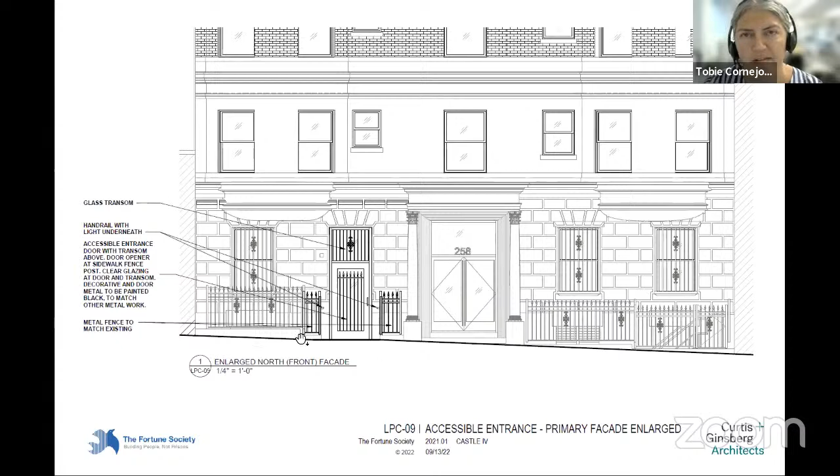And here's just a little bit more to show how this lays out, where it would be on the street.

I'll let Mark talk about the EIFS. Thank you, Tobie, and thank you, commissioners.

As Tobie mentioned, we've gotten a special pilot grant from HPD and NYSERDA to retrofit and electrify the project. As part of electrification, as many of you know, the first thing you want to do is lower the loads, and this requires adding insulation. Adding insulation on the interior is both not possible here, and even if it were possible, has issues of thermal bridges at the slab. But as you can see here, we're indicating where we would be adding an EIFS panel or EIFS system over the existing brick facade.

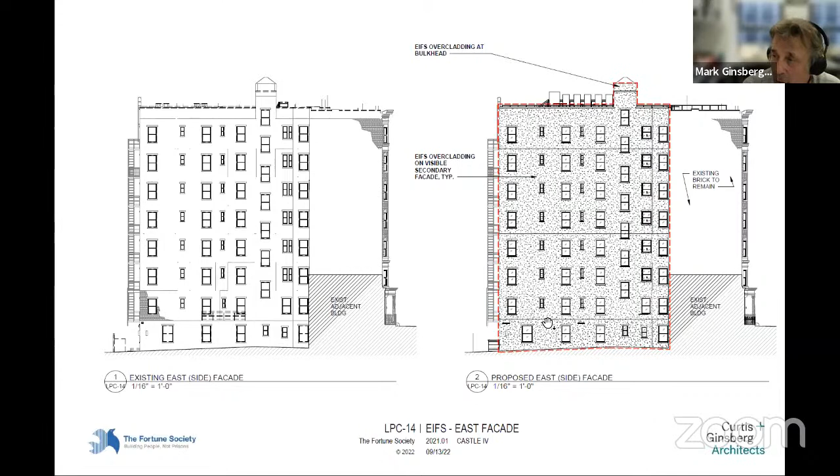Next slide. Here is a view showing where that would be added. On the right is the sample of the material we propose to use, which would match the color of the existing facade as much as it can. Obviously, there's variation in color. I should also note—

That the part of the facade that is a party wall, we legally can't do anything to, so that front section we can't touch. Next slide. And then the other side of the building is not at all visible from the street, and we would do the same thing. And as Toby mentioned, we can't do it on the rear facade, but we would also be doing it up on the bulkhead, which you can see up at the top.

Next slide. And then here are some pictures of that facade. On the left are the existing details. On the right are the proposed details. We're keeping the basic relationship of the windows to the exterior plane and also expressing the sill.

I should also note, we are not damaging the existing brick. We will be putting, after the brick is repaired and in good condition, an air vapor barrier on it. Vertical glue will be put on it for support attaching the insulation. And this creates a secondary drainage line in the building so that if water gets behind this initial system, there is a way out and it should not damage the existing brick.

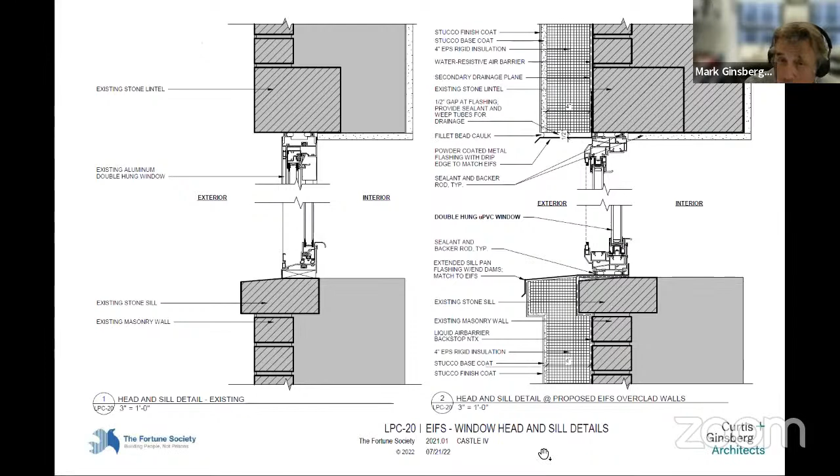As I said, we're trying to do as much as we can to improve the energy efficiency of the building in an appropriate manner. Next slide.

Up at the top, we would have a new camelback coping to deal with the wider facade, but matching what's there now. And as you can see, on the right is our termination detail, which also allows for drainage from the secondary drainage plane.

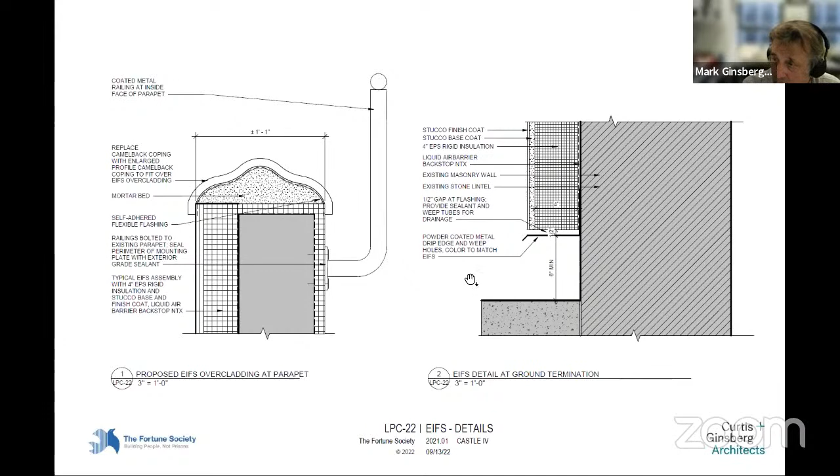Next slide. And with that, thank you very much, and we look forward to your questions.

Great, thank you. Commissioners, do we have any questions? Not at all about the scope or the material or the benefits and requirements for the installation?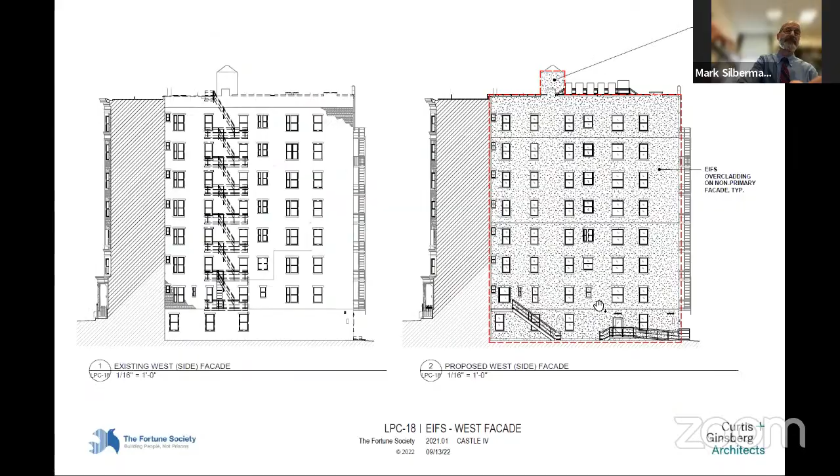The next public hearing item is number 10, LPC 22-10740, an application for a certificate of appropriateness in the Borough of Manhattan, block 1892, lot 66, 353 Riverside Drive in the Riverside West End Historic District Extension 2. A Beaux-Arts style row house designed by Robert D. Kohn and built in 1899 to 1901. The application is to enlarge an elevator bulkhead.

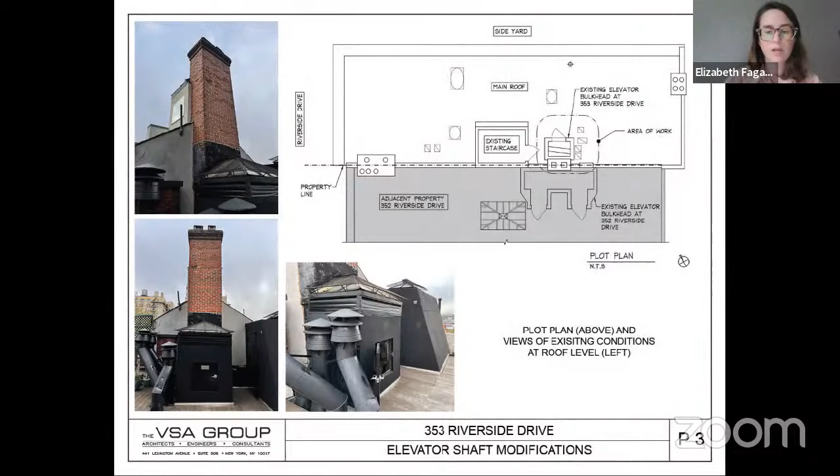There's also an existing stair bulkhead, which you can see behind the elevator bulkhead in the bottom center photo. Here is an existing and proposed roof plan. The footprint of the elevator bulkhead will remain largely the same in plan, and to the east or right of the bulkhead, there will be a new machine room with an access stair. The size of the extended elevator bulkhead and new machine room are the code compliant minimum, and the applicants are also available to discuss this in further detail if needed.

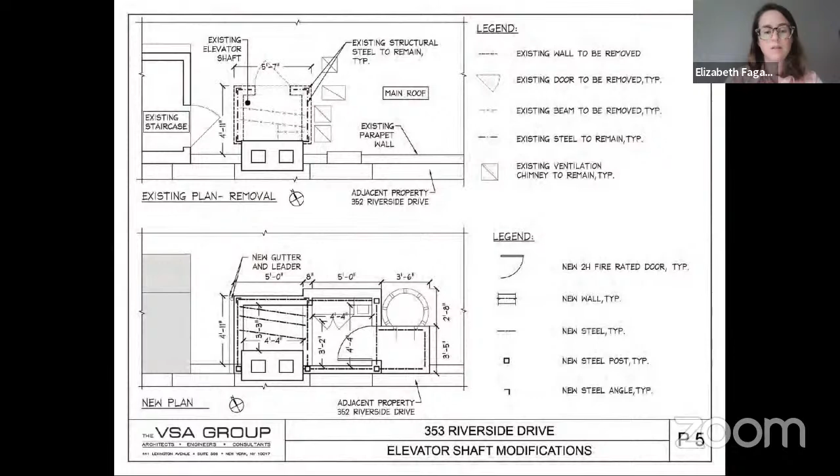Here again are the existing and proposed roof plans, and here you can see the existing roof elevation and current elevator bulkhead. Here is the proposed elevation showing the elevator extension and new machine room and access ladder on the left side of your screen, supported by steel posts. Here's just a series of additional elevation and section drawings. Note that flues at the adjacent chimney will also need to be extended.

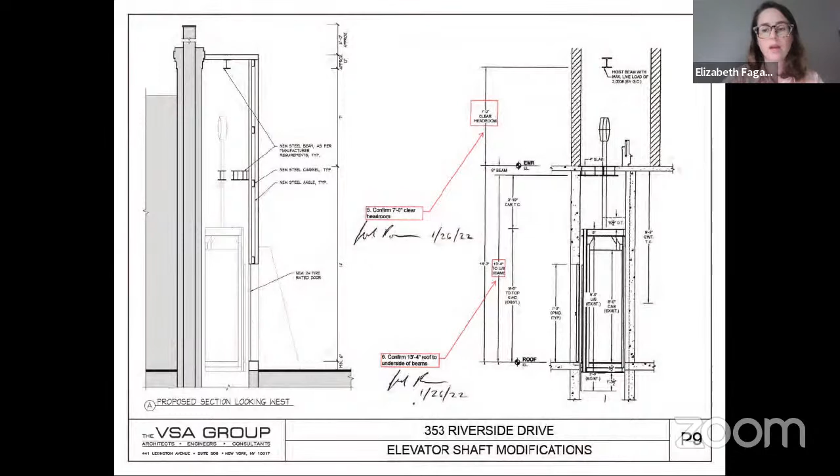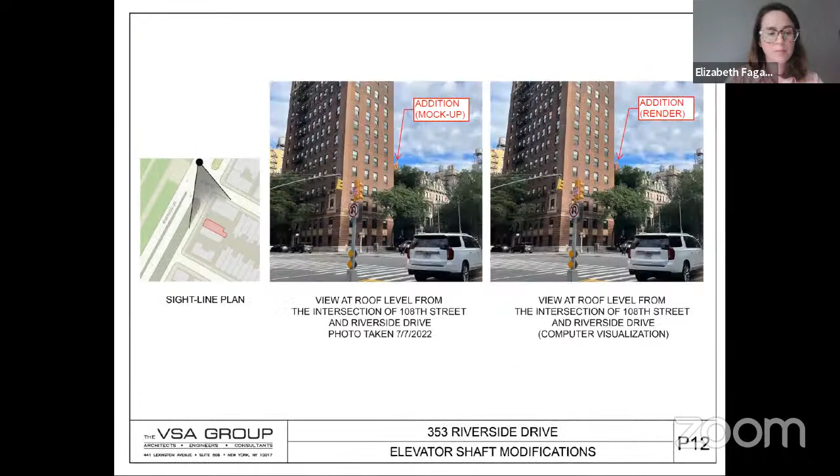Here are drawings from the elevator consultant showing the required headroom dimensions of the extended bulkhead. The proposed work is visible from both the north and south along Riverside Drive. Here you can see photos of the mock-up and a rendering from the north along Riverside Drive, with some additional photos again from the north. And from the south, you can see here a portion of the bulkhead and flue extensions are visible. In the foreground of the brick chimney, please note that the gray stucco area is part of the elevator extension at the neighboring building.

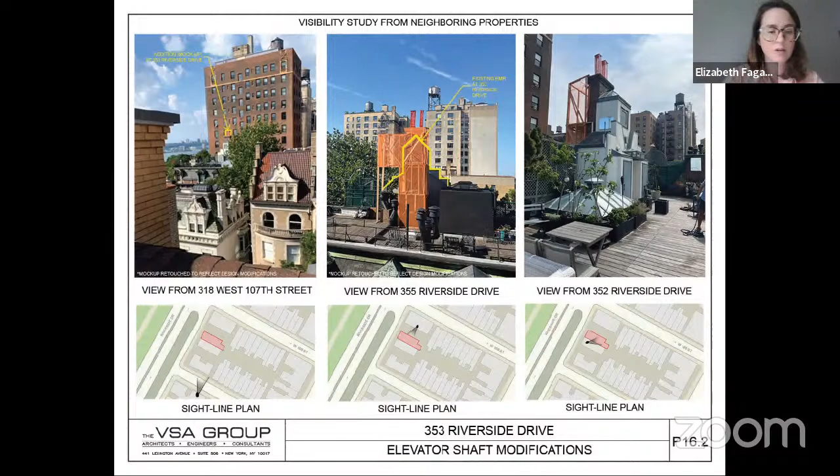Here are photos of the mock-up from the roof, and on the right image, again, you can see the existing elevator extension in stucco at the neighbor. Here are some current views from Riverside Park, and a rendering of the elevator bulkhead extension, which is proposed to be clad with a brick veneer to blend with the existing chimney behind it. The machine room is a buff colored stucco along with neutral gray chimney flue extensions.

And again, just some mock-up photos and rendering from an adjacent roof. And then finally, no visibility directly across the street from the building. I'll end here on the rendering and mock-up slide. The applicants are also here to answer any questions or clarifications you may have.

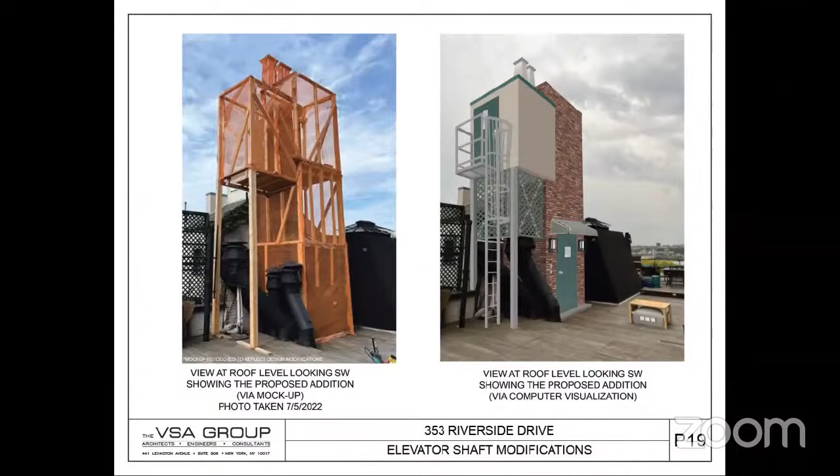I think I can speak to that. This project has been in development for a long time, and we knew for compliance reasons and the age of the equipment that we would be up against this. So we identified the best machinery for our property, given the extreme space constraints: Hollister Whitney, which is the gold standard. The manufacturer and the elevator contractor, through about three rounds, made some concessions to placement of the interior items, the footprint, the height of the ceiling, the width of the door, and made no further concessions after that point. One thing we were able to do after the community board hearing was to engage our elevator consultant again just to make sure there was nothing further we could do.

What we did do, as an evolution from the last presentation, was to drop the stucco portion against the chimney to give it a less monolithic appearance, and also to reveal a little bit more of the skyline. If you look at the following page, which shows a wider view, you'll see the sight lines are on other buildings with pretty unsightly appurtenances. Looking at the rendering, we don't find this objectionable. What you would be looking at in any case is a chimney of the same height and less depth. Without this, you're also looking at the rear of the bulkhead on the neighboring property, which has been extremely cooperative in supporting this project.

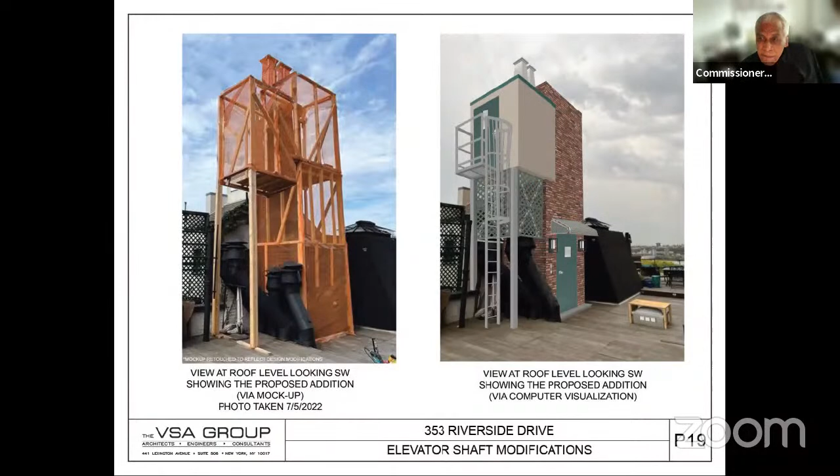And perhaps they could just evaluate whether two materials or one material would be less visible. Okay, that sounds great. Commissioner Chapin, would you second that motion? Second. All right, Mark, will you call the vote?

Chair Carroll, Aye. Commissioner Bland, Aye. Commissioner Chapin, Aye. Commissioner Goldblum, Aye. Commissioner Gustafson, Aye. Commissioner Jefferson, Aye. Six in favor, none opposed. The motion passes. That's approved, and we'll move on to the next item.

The next item is public hearing item number 11, LPC 22-11906, an application for a certificate of appropriateness in the Borough of Brooklyn, block 1244, lot 81, 236 Albany Avenue in the Crown Heights North Historic District. This is an altered Renaissance Revival style row house designed by Irving B. Ellis, built circa 1899. The application is to legalize storefront infill and windows installed without LPC permits.

Okay, commissioners, the applicants have entered the hearing and the staff will take you through the presentation.

Good afternoon, Commissioners. Marcello Pacheco, Preservation Staff. This item is 236 Albany Avenue in the Crown Heights North Extension 3 Historic District. Earlier this year, four warning letters were issued for work completed without permits. Two were issued for installation of light fixtures, cameras, intercom, paving, and fence modifications. The applicant worked closely with staff to address these at staff level, and these two violations are in the process of being rescinded.

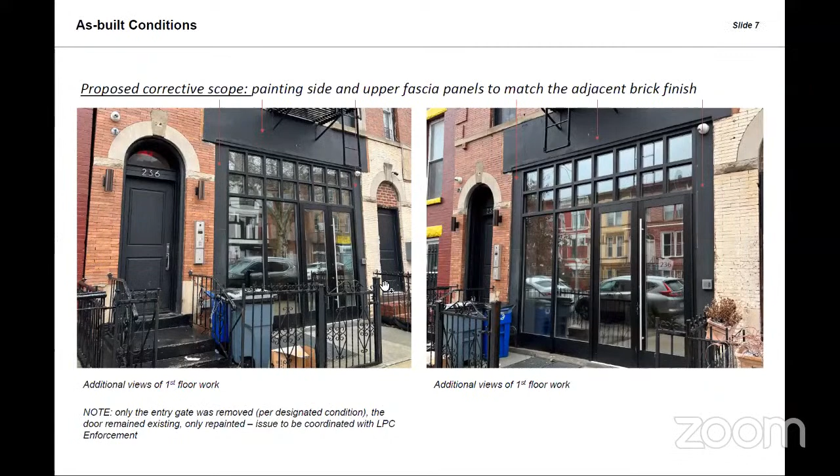I had a quick question about the windows and the profiles of the windows, and it might be easier for staff to answer that if you know it. Sure. Marcello, is there a panning or a profile on the windows? No, there's not a panning on the windows. Okay, so in the photo, I noticed on the block there were some other houses that all looked the same.

In terms of there being a frame and then the glass inside it, so there's two layers. I don't know if I could share my screen with you, but there's the frame and then there's a perimeter around it, and everyone seems to have the same exact thing that I do. I was actually there this morning to take a closer look, and I noticed that all of them look the same. Okay, so...

Those may or may not be good models. We're not sure if those are historic conditions or not. But traditionally, windows in a masonry building would have a brick mold or panning to recall a brick mold around it. So we can think about that.

Okay, commissioners, do we have any other questions? All right, let's make a motion to close the hearing. Commissioner Gustafson, would you make a motion to close the hearing? So moved. Thank you. And Commissioner Bland, would you second that motion? Second. All in favor, say aye. Aye. Any opposed? Okay, so the hearing is closed and we'll begin our discussion.

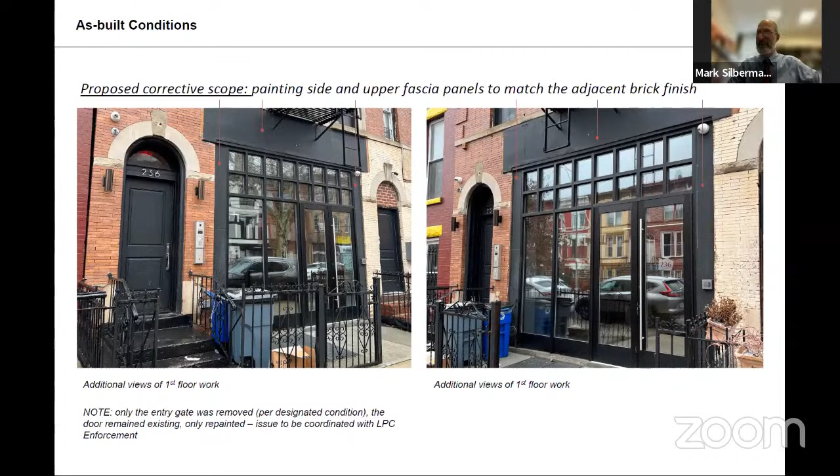All right, so it's approved with those final modifications. So please continue to work with the staff on those refinements.